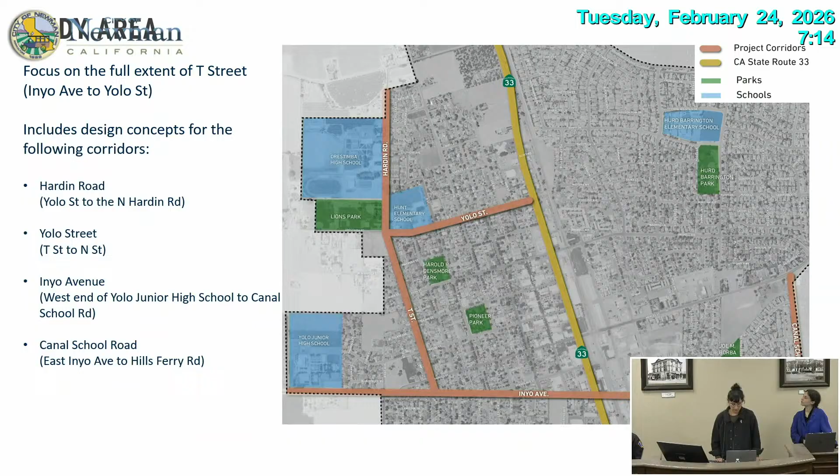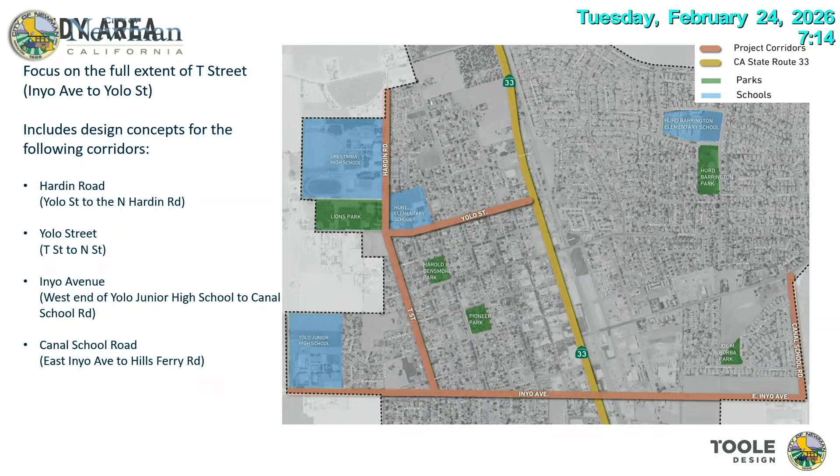So again, the focus of this plan is really on T Street, running from Inyo to Yolo Street. But the plan also looked carefully at designs for Hardin Road, Yolo, Inyo Avenue, and Canal School Road as well. Again, for those additional corridors, we came up with active transportation recommendations, but really, again, the core focus of the plan was on T Street itself.

There are three key goals we focused on to develop the designs for T Street and the additional corridors: connectivity, which is about helping people connect to important community destinations with a focus on schools, but also parks, downtown, the Newman Environmental Wetland System project, and future developments and recreational opportunities coming online. Access, expanding options for people to access those destinations by modes other than motor vehicles, like walking and biking. And lastly, but not least, safety, prioritizing safe options for people of all ages and abilities walking, biking, and rolling to get around Newman, especially for school-aged children using these corridors to walk and bike to school every day.

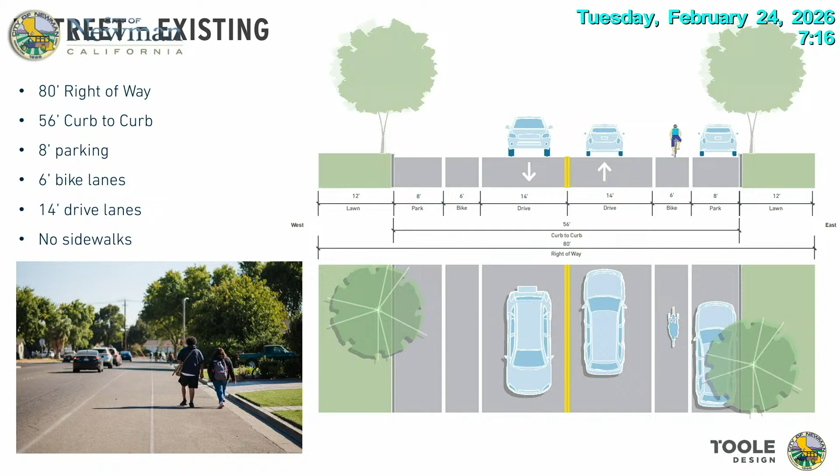So now I'm going to walk through T Street designs itself. This is an image of T Street today. It has a really wide right-of-way, 80 feet, 56 curb to curb, 8-foot parking lanes, 14-foot drive lanes, and importantly, no sidewalks. With school-aged children using T Street every day, our top priority is really to provide pedestrian facilities that feel comfortable and safe for kids and family.

We also know that a key stakeholder along T Street are the residents themselves. Many homes today don't have driveways, so the residents along T Street really rely on street parking. In addition, the front lawn areas have mature trees located within the right-of-way that are very special and feel important to residents along the street. So an important goal of our design was to maintain the existing curb-to-curb width and keep those trees and parking spaces available for residents.

So this is the design we're recommending for T Street, which is something we call a bike boulevard. The bike boulevard has no impacts behind the existing curbs, so the existing curbs remain in place. We narrow the travel lanes down from 14 feet to 11, which allows us to install 9-foot sidewalks on both sides of the street. We're also proposing to leave existing parking on either side of the street, but to look for opportunities for regular traffic calming treatments, like bulb outs and speed cushions.

There's a couple key details of this plan I wanted to call out. We are proposing that driveway ramps be reconstructed at 4 feet wide, which would allow for a 5-foot continuous clear path for pedestrians along the sidewalk. That means better ADA compliance and allows people using wheeled devices to easily navigate the sidewalk, so they're not going up and down, but able to stay at a continuous level path.

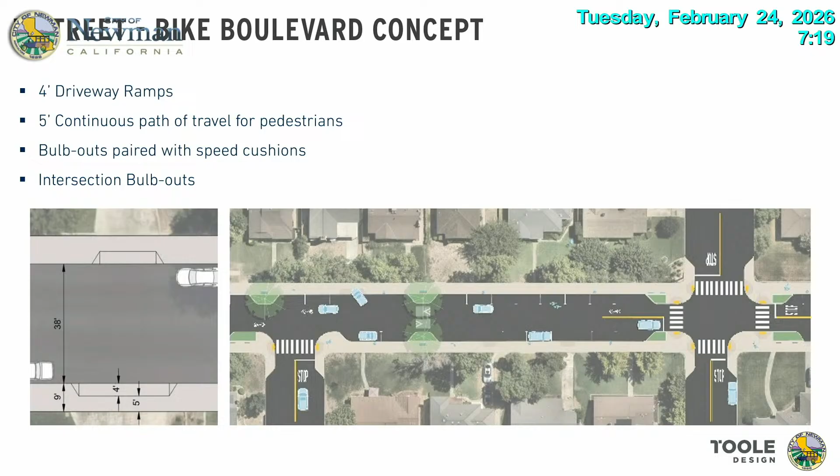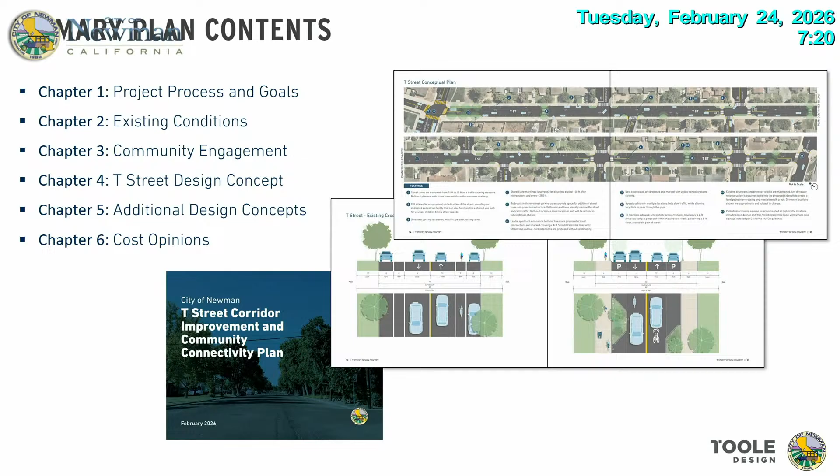So that was T Street. Just one last slide here that overviews the plan contents. Chapter 1 summarizes our project process and goals. We have a chapter that overviews existing conditions for T Street as well as the other key corridors. A chapter that talks about the community engagement we have done and some of the key feedback that informed our design. A full chapter dedicated to T Street design itself. And then we also have additional design concepts for the remaining corridors, and a chapter with high-level cost opinions and some strategies for funding and next steps.

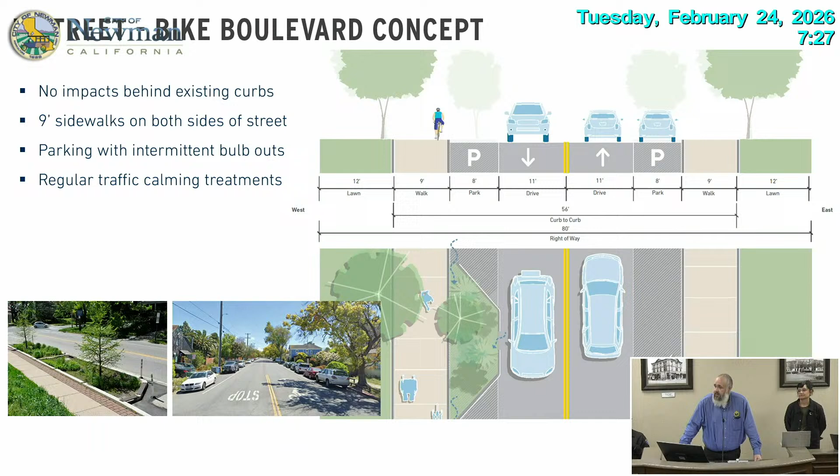Can you go back to the previous slide of T Street, the existing one? So in thinking about those mature trees and bulb outs, is there any concern about the existing drainage system, being the older part of town, as well as the placement of where they're at right now in those bulb outs? Are we going to have to add more or relocate our current drainage locations in order to worry about any potential flooding down the road?

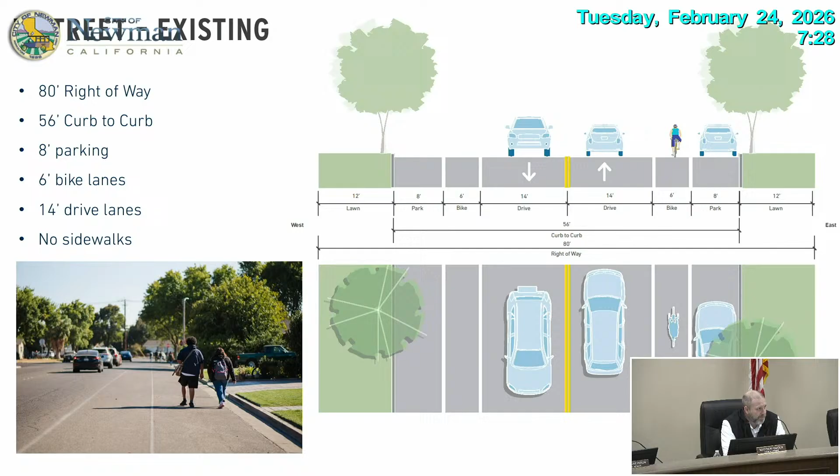Yes. So in the design concept and consideration, we did look at stormwater management in those bulb outs. It's a good practice in many communities and best practices to use those bulb outs as a mechanism of stormwater removal and conveyance. It would be factored into the design when connecting to existing stormwater infrastructure, to be able to move the water off T Street.

Anyone else? Oh, you guys asked the questions I was going to ask. Well, excellent job - we appreciate all the hard work that was put into this, and I'm glad the community was involved. So with that, I'll bring it back to council for action.

Mayor, can I say one thing? I just want to thank everybody that participated, both the residents in town on T Street and the other corridors. Sometimes it can feel like input fatigue - we do ask for a lot of input from residents, but it's very important for us to have that. Additionally, the current Toole Design team - Anju, Christy, Kyle - and some previous Toole people who are no longer on the project did keep it moving forward, and internal staff really were able to get this project to where it's at now, and ultimately Caltrans for supplying this grant for us to be able to develop this plan.